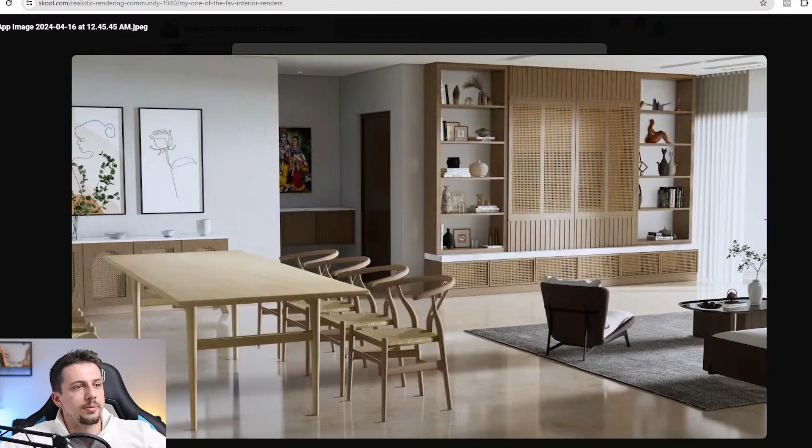So I'm going to start with the first one from Logesh Warren. Let's go through a few of them and see on which one we can kind of give the most feedback on, right? Let's try this out, okay?

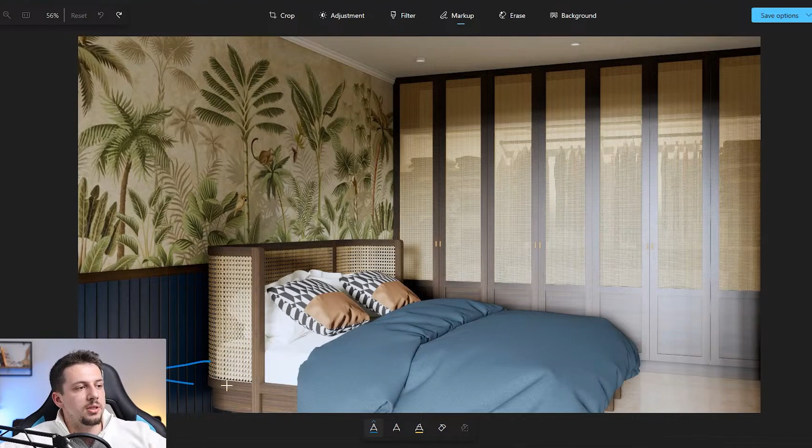This render is a bedroom render, and what I would say is the main issue is the composition. So what I would definitely do is lower the eyesight or the point of view here and try to capture a different angle, and this whole room definitely needs some more context. So maybe a bedside table here, right? And another one over there, maybe some lighting coming from the ceiling down here. Maybe the design choices weren't your call, but that can definitely help.

The lighting doesn't look that bad, honestly. It looks like an early morning type of stuff. Overall, pretty good. The wallpaper looks good. The composition is fine. These pillows, I'm a bit skeptical about them since I do not think they're sitting well. I guess you added these on top of an already existing model, right? So these pillows, I think they're taken from Enscape.

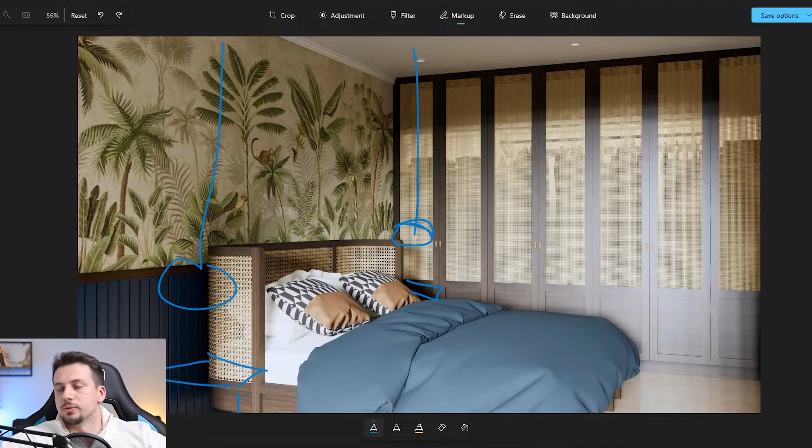That is one thing, and I would definitely try to make this material a bit more realistic. Maybe try to use a PBR material or something like that. But overall, I like the materials. Main thing here, composition, and maybe some more context in terms of design, but definitely composition can make this look a whole lot better.

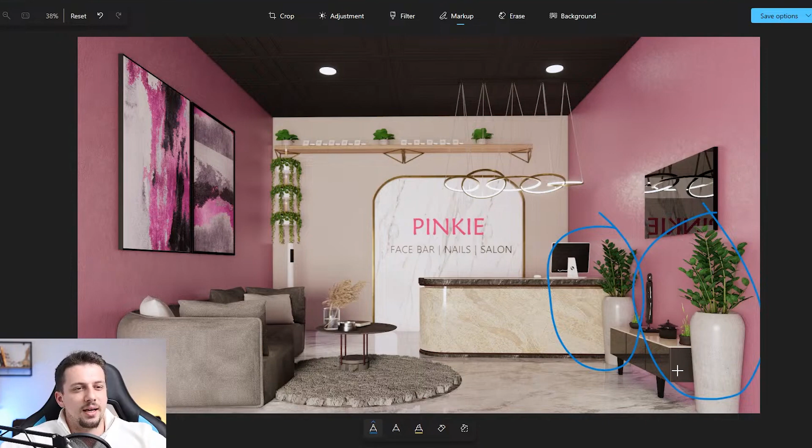Usually, as a general rule of thumb, I do not like to keep the camera angle, where the view is coming from, and where the sun is coming from the same way. Once again, as I said earlier, these two plants are the same height, same rotation, same everything. This is not usually advised. We need some more randomization here, and the TV is just way too reflective. These are just some of the things that I would say you need to improve, just top of my mind.

But honestly, I think the main problem is these design choices and the material choices. I'm guessing you probably weren't in control of that, but trust me, it's very hard to get out a good render if the actual design is not good by itself.

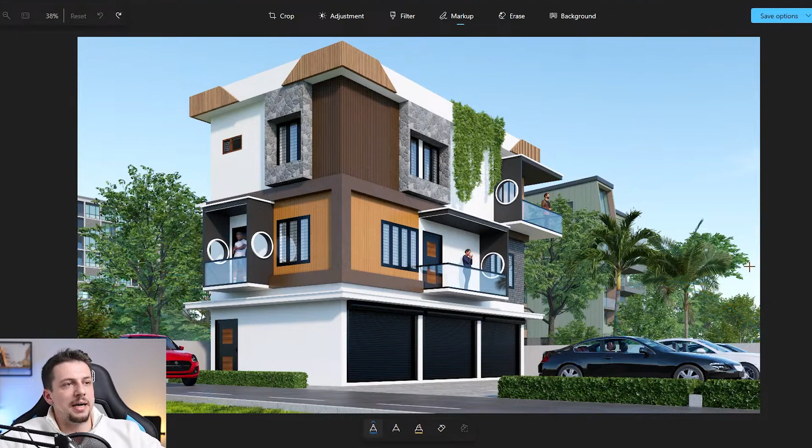As far as this render goes, I really like the lighting. The way that it's coming in, the material is looking very cool. The wood here is looking perfect, right? As far as the building goes, I love it. It's looking very good. What I think would make it better is maybe some more attention here in the foreground, maybe a higher quality car here or a vehicle.

Maybe some more context in terms of story, maybe some people there, and maybe some vegetation here at the balcony. It just needs a bit more context overall, maybe some more variety in the vegetation over here as well. I think the main issue here would be the surrounding, and that's me being probably a bit too picky, because overall the lighting looks great and the materials on the building look great, even the forms and the shapes look perfect. So that's just one thing on my side.

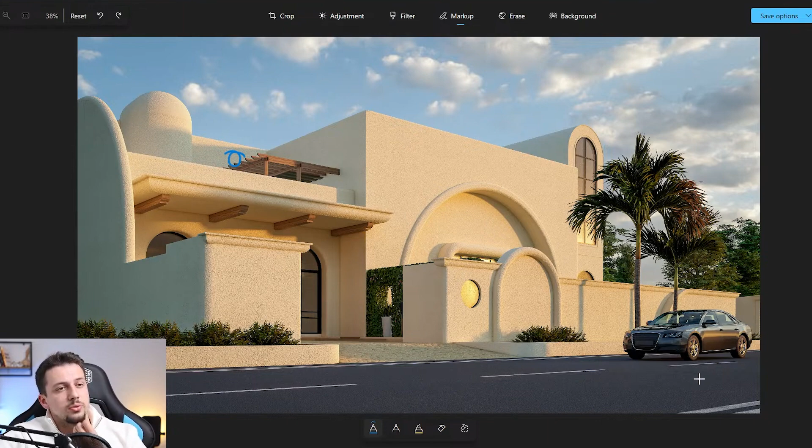Take care of the surroundings a bit better, replace this car with something looking a bit more realistic, add some more variations with the vegetation, add something over here as well. And other than that, very good. I like this a lot.

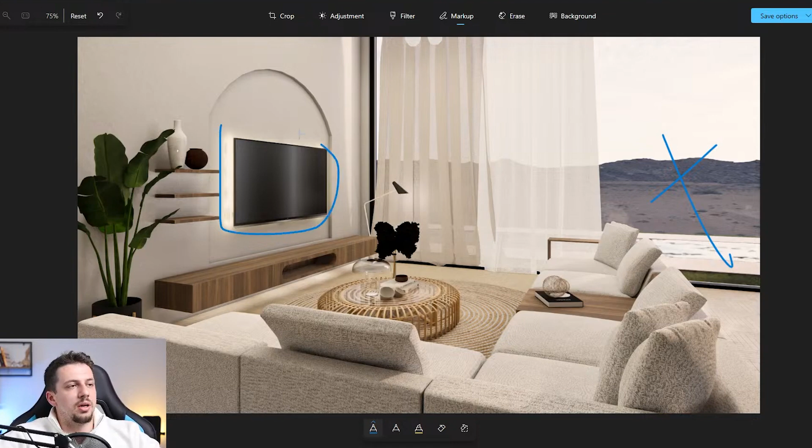First of all, take off this background. This is the Skybox default in Enscape. Try to switch it out for an HDRI, and that is going to help with lighting a lot as well. The line lights behind the TV are just a bit too strong, and the main issues here are composition and lighting. The materials are okay, but what would make the biggest difference here is

if you take the camera a bit backwards and try to get an angle where maybe you're facing something like this, if you get what I'm saying. So maybe this edge of the wall, this corner, is in the center of your view, and that could help a bit more. And try to keep the camera in a straight angle rather than looking down as it is doing right now.

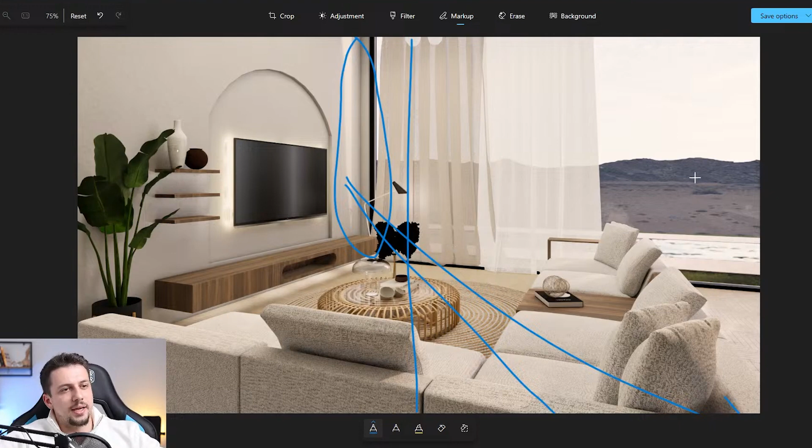Other than that, I would say turn off the sun brightness of Enscape completely, and maybe direct some spotlights from the outside. I'm not sure if you've already done that, but even if you did, it's not very viewable. You cannot really see that effect that much, because I think you need to turn up the intensity of the exterior lighting and tone down the intensity of the interior lighting. So that's what I have to say.

What I would say for this one, honestly, it's quite good. I'm not sure why it's so low resolution. It almost looks like a screenshot, to be honest. This right here, I can tell that it's an Enscape model. Honestly, it's looking very good, but I think the main issue here is color correction. It's a bit too dark and maybe a bit too warm.

So maybe I would make it a bit cooler and increase the exposure here, right? Other than that, honestly, I wouldn't change much. It looks very good. It's well balanced. The composition is good. Maybe the carpet can be switched out, but honestly, that doesn't even bother me too much. Main thing here, color correction. Try to brighten it up a bit and maybe change the saturation or the color temperature. So that's what I have for this render.

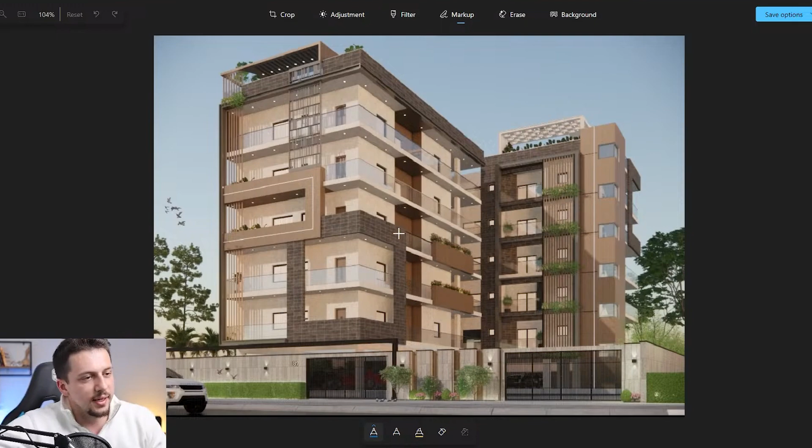So first of all, I would make the aspect ratio at least widescreen or something similar, because this is kind of a weird aspect ratio. It doesn't fill up the whole screen either. The design choices, I'm not going to talk about them too much, but the main thing is I would add an HDRI that matches well with the lighting that you're going for.

I would definitely play around a bit more with the surroundings. I would take off the flock of birds there, that's a bit cliche and overused, so I wouldn't want that. And honestly, for the composition, maybe go a bit backwards, capture more of the road, add more context.

People walking around, maybe the vegetation needs a bit more variety. The other thing is that if the exterior lighting, the sun, is this harsh as it's hitting here, then the artificial light cannot be this strong, because it looks a bit too much.

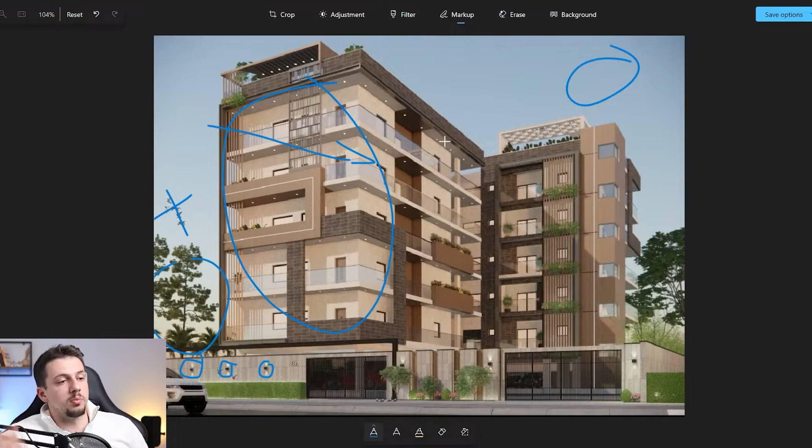So the balance between the artificial light and the natural light has to be there. What I would do is first add the HDRI - that's going to make the biggest difference and take care of the lighting. Once you take care of the lighting, go for the composition, go a bit more backwards that captures the road.

And add more context to the surroundings - that's what I can see here. Maybe add some people here in the balconies, maybe over here, but those are the main things. Overall, I think once you do those, there's going to be a huge improvement in this render.

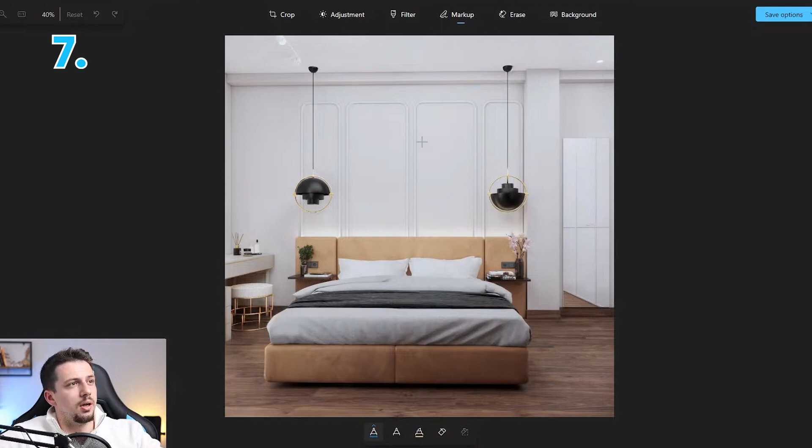The lighting looks nice and soft, the modeling looks good, the materials look all right. Maybe I would add more reflections to these wall panels over there, but what needs improvement is the composition. If you try to guess where the center of this render is, it's definitely not where the center of the actual bed is either.

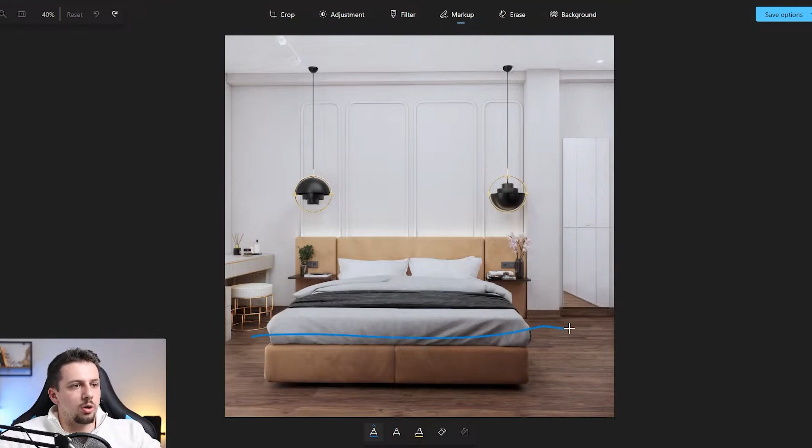So maybe try to move the camera a bit more to the left and facing parallel to this wall here. Also, maybe adding something like a picture or a mirror here helps as well. Maybe add a carpet here because it looks a bit too empty. Maybe a larger plant - I'm not sure you would add that anyway, but those are the main things.

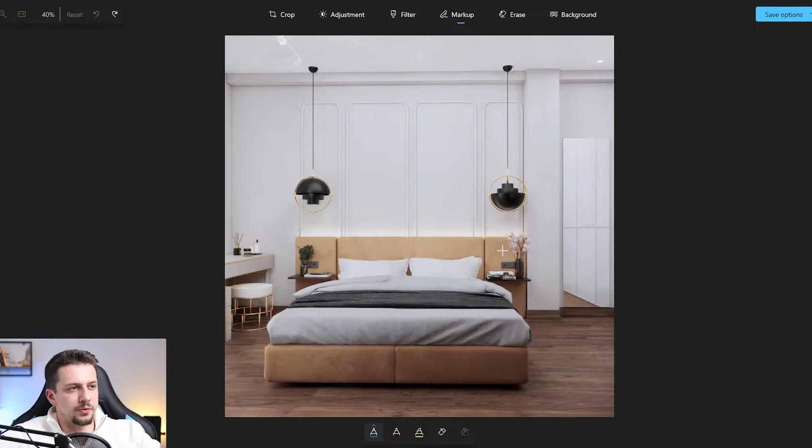What I would say is maybe we need a bit more shadows - maybe the shadows are just way too soft right now. And then maybe lower down the intensity of the artificial lights. But overall it looks very good, I'm just being a bit too picky, but at the end of the day, if that's what you want feedback on, that's what I would say would be helpful.

So for the final render, let's go here at markup. I'm going to go to markup. What I would say is turn off the Enscape sun completely and add artificial lights in the exterior.

I love the way that it looks here in the back, honestly it looks very good. But what I would say is the sky looks a bit too white, so maybe the sky can use some help into being a bit more realistic. So maybe try to add an HDRI.

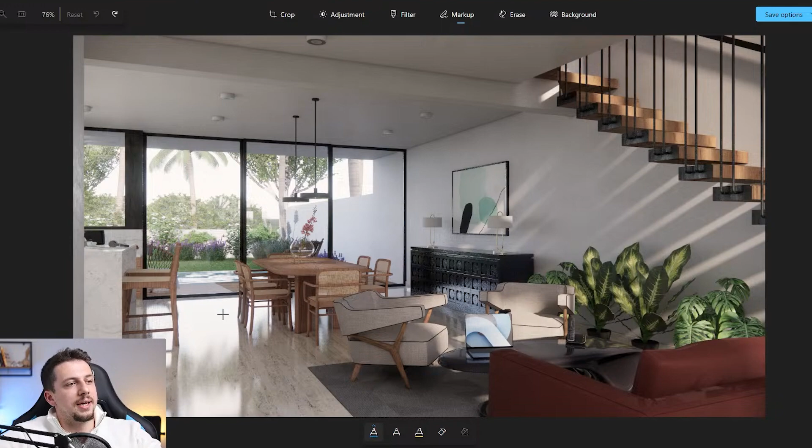And the whole render looks a bit not enough saturated, I would say. So let me just try and add some saturation in - something like this could help. Maybe it's not perfect the way I'm doing it right now, but maybe with some tweaking in the software as well it can help, and definitely try to add an HDRI with the sky looking more realistic there.

The other thing is the plants as well - I think someone mentioned this in the comments of the school post too. So try to tweak the plants, make them a lot more realistic too. That could definitely help. And the composition - like usually an area like this, I think doing renders area by area would look best.

Because right now there's a bit too much information to gather and not a single point of direction. And I guess if someone was scrolling and seeing this render, it would just be too much to take in and it would just scroll away.

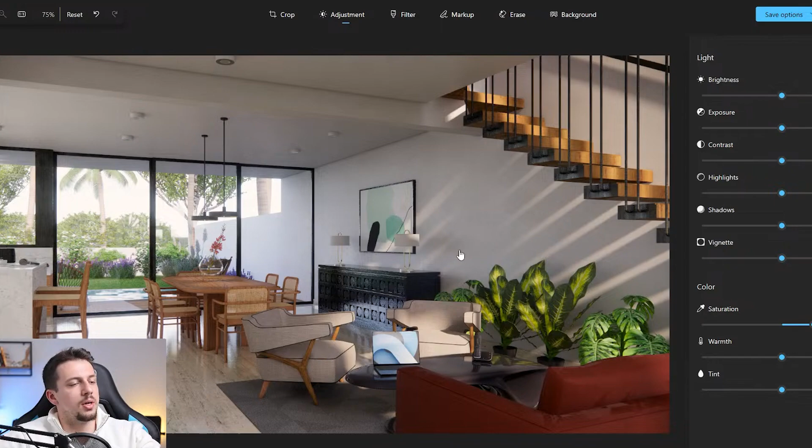So what I would say is, if you're presenting this render, just do area by area for the render. I understand that maybe you want to show the inside-out connection of the design or something like that, but I'd say even the composition needs a bit more improvement, though overall it's looking good. As I said, I like the way the outside there looks as well. If you take these comments in, I think it can definitely improve.